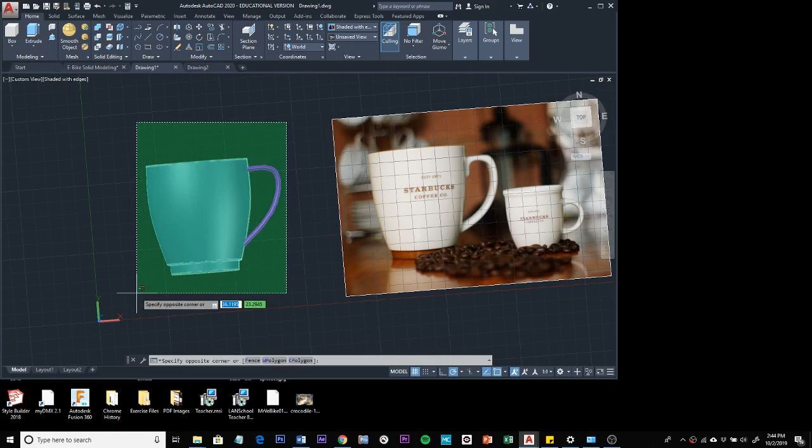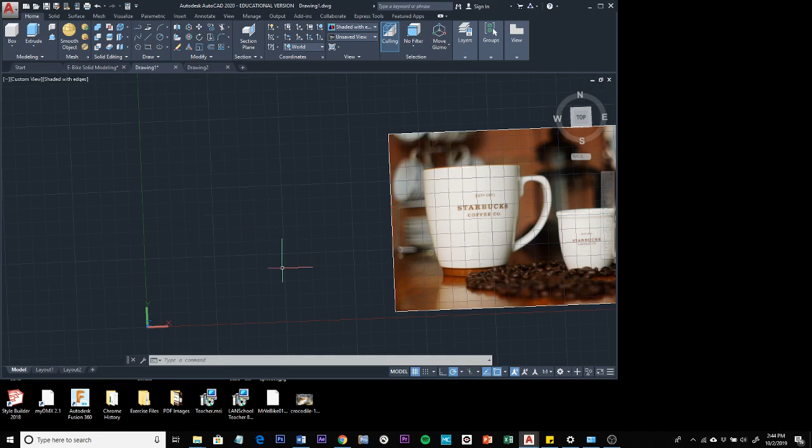So this is the goal here in mind, that I wanted to kind of recreate this shape. You could come up with your own design. You could find a mug that you want to copy or try to emulate online. But I just found this image and imported it in here just to show you visually what I'm trying to copy. So I had a bunch of reference lines here, but I'm just going to freehand this. And I also have a bunch of layers.

So however you want to organize your project, that's up to you, but I would advise you to stay organized in case you want to isolate a specific layer and hide the other ones. You could create multiple layers. I created a cup layer, a handle layer, a 3D cup layer, and a 3D handle layer. And if I wanted to, I would create one more that would be just the finished mug layer.

So I'm going to do this in steps and copy my work over so that I retain my original drawing. You don't have to necessarily retain yours, but it's always good if you want to modify later to keep steps. So what I'm going to do first is create this outline, and what I'm aiming for is just half of the mug. I don't have to do the whole thing. Just starting at the half point, I'm going to trace just visually the outline of this mug.

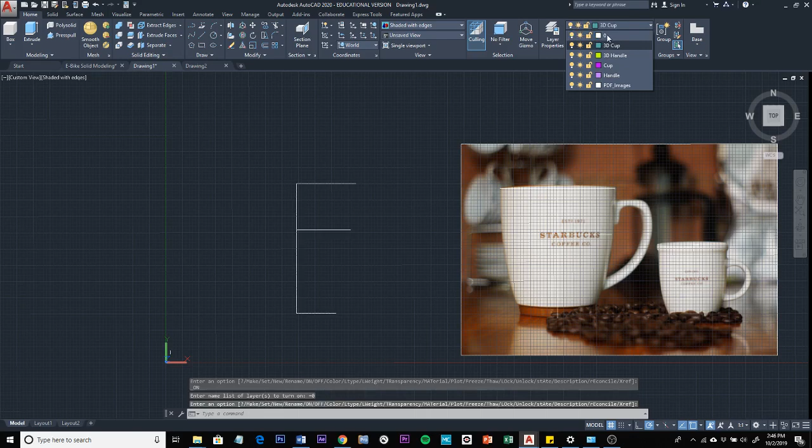To do that, I'm going to use the line tool to get started, and on my 0 layer, I'm going to turn it on first, which is one that you have as a default. I created a couple of lines here that are just reference lines for me. Since I'm trying to create a specific shape, I used this picture and referenced some lines.

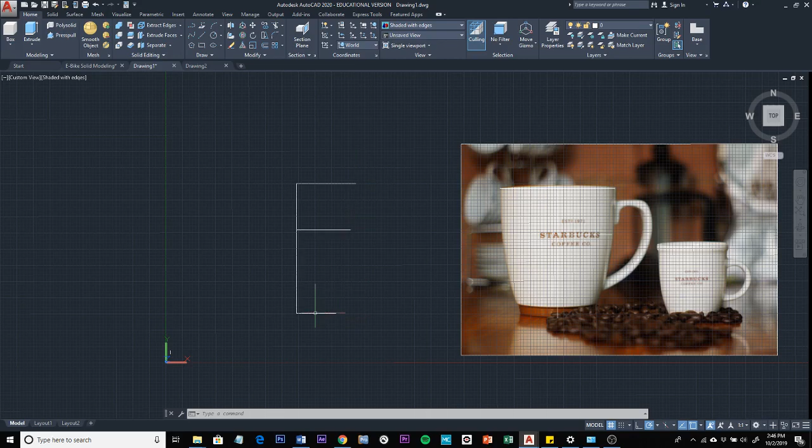So this is the line from the bottom over to the edge, the midpoint, and then this is the midpoint out to the edge at about where the Starbucks label is. And then I did a midpoint out to the outer lip to just give a rough shape. Using these points, I can create an outline. So I did a little bit of work ahead of time. You could freehand this, but I advise you to just stick to a plan.

And if you want to use straight lines, there's parts of your cup that'll have straight lines, and then on this there's a curved line, which is something that I would like you to use in this exercise as well. So a curvy line like this is going to be created with the Spline tool. And there's 2 modes to create lines with Spline. If you hover over the tool, it will give a good description there. You can either draw a spline with fit points or control vertices. And I will show you the difference in just a second.

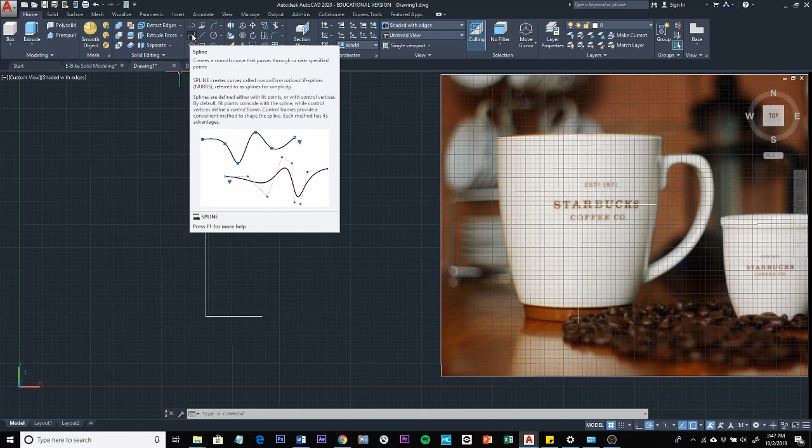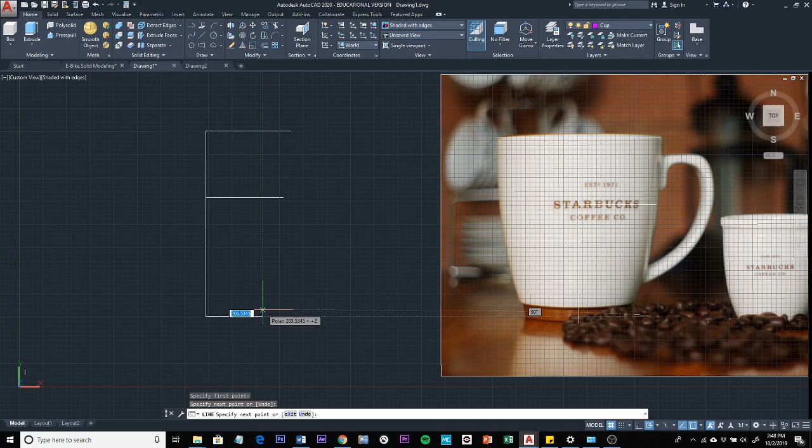So I'm going to start modeling using these reference lines, and I'm going to be on my cup layer. With the cup layer on, my first couple lines are going to be straight lines. So I'm going to use my line tool here, and I'm going to click. This is going to be the midpoint of my cup. I'm going to click there, and this will be the base. So that's the base of my cup. And you want to make sure you have a wide enough base so when your cup is full of liquid, it's not going to topple over. Just keep that in mind when you're designing your cup.

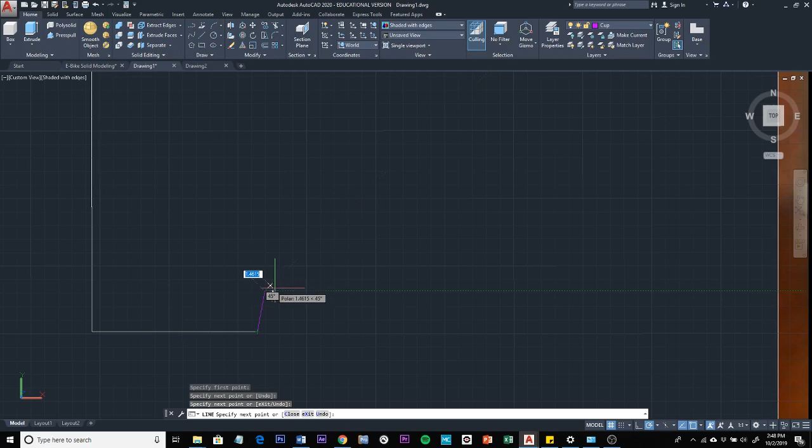Alright, and then I'm going to step up just a little bit here at a steep angle. But it's not a 90 degree, it's kind of angled out. And then I'm going to step over at a little angle here, just a little bit. If these reference angles are bothersome to you, like these snapping points, you can temporarily turn them off down here. Polar tracking is the one that really snaps to those lines. So with that off, I can more easily freehand. That's a better way to put it.

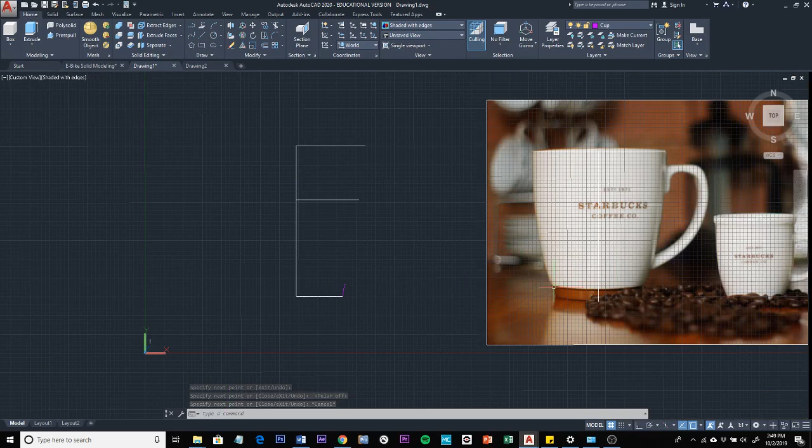So I'm just going to give a little detail here. I'm going to zoom out to show you what I'm trying to create. So there's this little jut that comes out of here. So it needs to be a little bit longer. After you make a line, if you want to elongate it, you can just simply click on it and you get these stretch points. So I'm going to click on that point and then stretch it out.

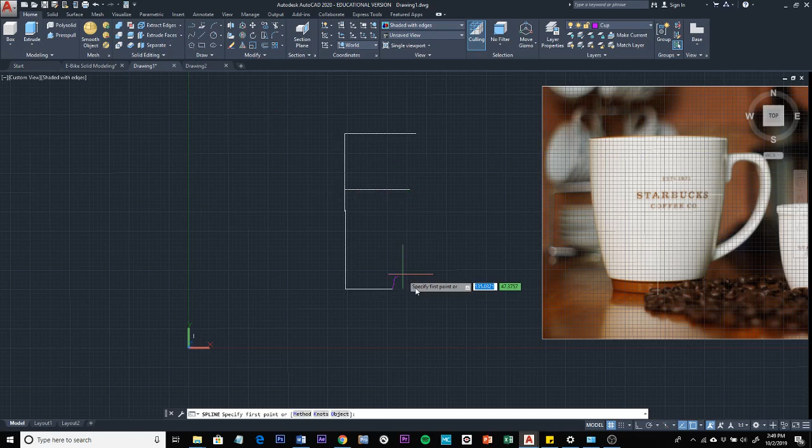Okay, that's a little better. I just want a little detail there. So this next line is going to be created with the Spline tool. It's a curvy line. So I'm going to click on the Spline tool, and then it wants to define a starting point. I'm going to snap onto the end point of this line.

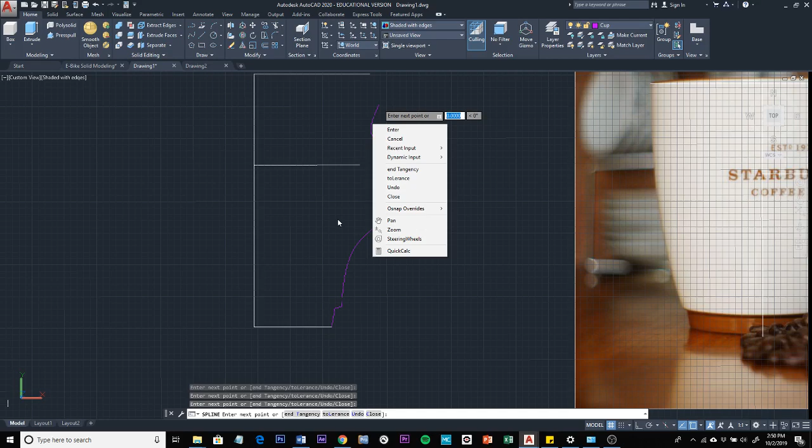And then the way this works, I'm just going to create a crazy line here to show you. But it starts to create a curve, and the next point that you would click controls kind of the shape of the spline. So let's just say I wanted to click out here and then go way over here, make this nicely weird shaped cup. Whoops. Alright, so there's a nice spline.

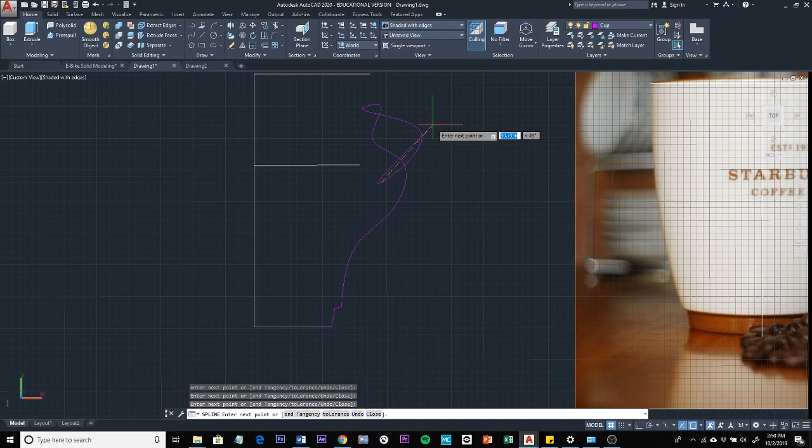So I don't want to keep this line. I'm going to start over. If I hit escape normally in a line tool, it would keep your line. It would just be done with the line tool. With the spline tool, if you press escape, it will not save any of your line. So to accept this line, you have to press enter. I'm not going to. I'm going to press escape, and it's going to remove the line completely.

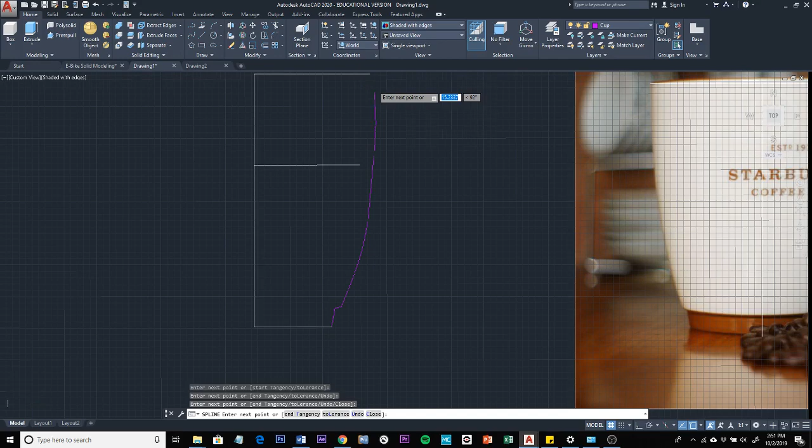Alright, so there's that. Now I'm going to be more realistic in my approach here and create a nice curve for my cup. So I kind of want to go over, and I'm actually going to go outside the bounds of my guideline here. Maybe I'll click right here, then click again over here, and then end it here at the snap point. And again, I don't want to press escape because that will undo my line. I want to press enter.

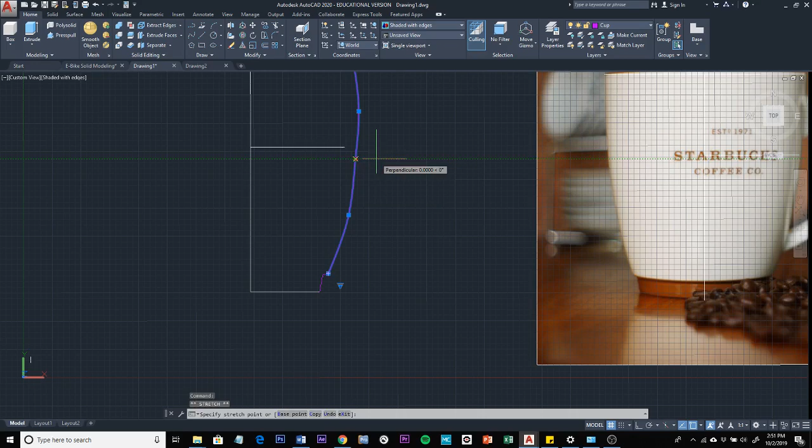Alright, so here I have a spline, and if I select it, it has retained these points here. These are called stretch points. Actually, they're fit points. So you can stretch your fit point, like change its location, by hovering over one of them till you get those arrows, and then you would actually just click that point and then move it away from the origin and then click a different spot. So that's an easy way to adjust these.

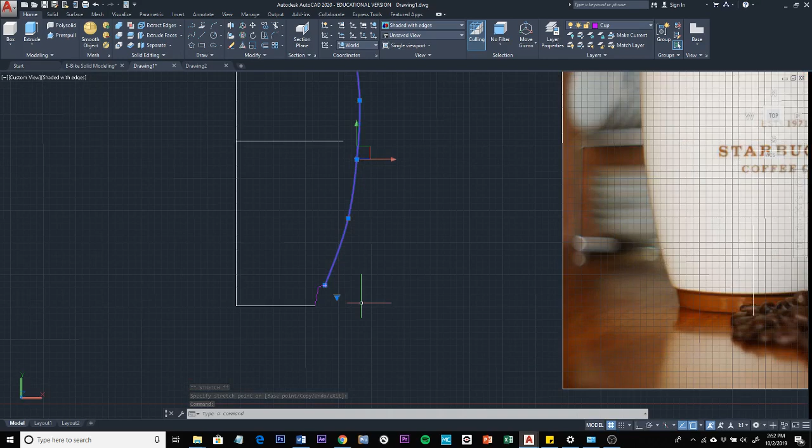So I'm going to make an easier adjustment here. And just to show you the difference, if this was created with the other method of creating a spline, which would be using control vertices, this is what it would look like. So down here, once you have a spline selected, there's a menu that can be found in this down arrow. I'm going to change to control vertices instead.

Now with control vertices, the vertices follow the line, but they're not on the line, and these are kind of like gravitational pulls. You can grab one of these and pull it away, and it pulls the line that way. So each of these have kind of a gravitational pull on the line, and you can use that to kind of edit the shape.

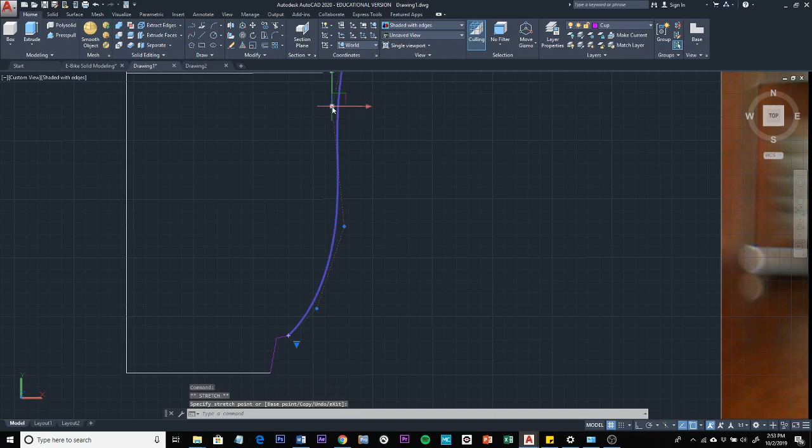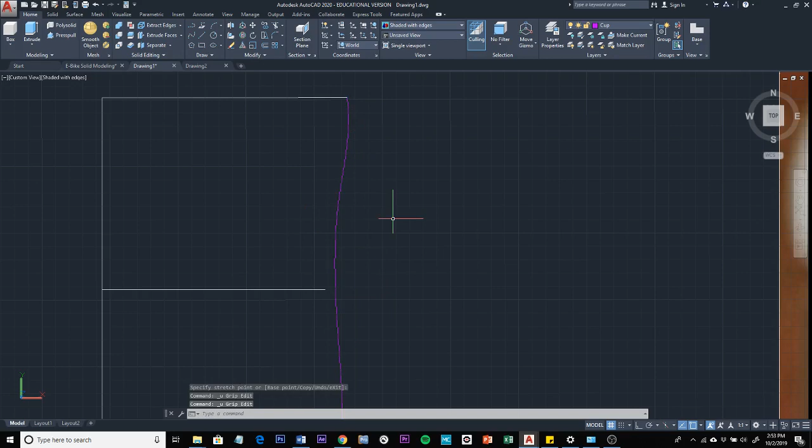I personally like to use the fit points instead of the control vertices because it's a more exact placement. But this, I don't know why someone would choose this, but I guess you have a little bit more freedom in creating more natural looking curves with the control vertices. So I'm going to undo all of that. Go back and change this to fit points.

And I'm going to edit my shape a little bit. If it doesn't do what you want it to do, you may need to zoom in to the point, because it may snap right back to the place it was before. Alright, that's a pretty good shape. Move this one up a little bit.

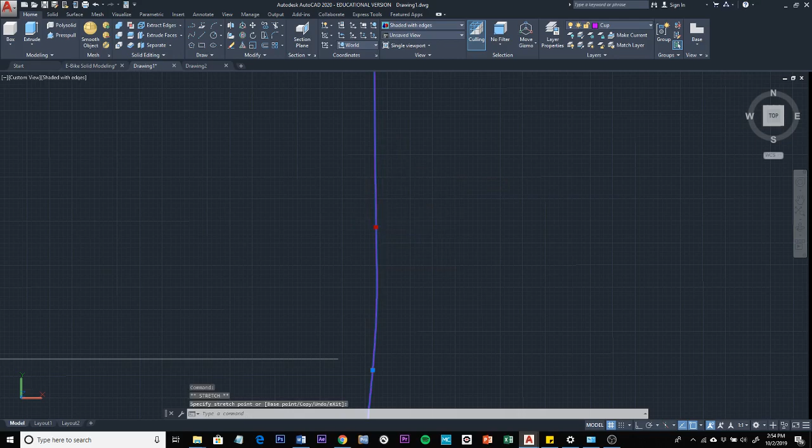Alright, so what if you made your spline and you didn't give yourself enough of these fit points? You want to add more curves to your shape. Or maybe you added too many, and so it's really hard to adjust it to make a smooth, continuous line. You can remove them really easily by hovering over it and then select Remove Fit Point. That's easy. Getting rid of them is easy.

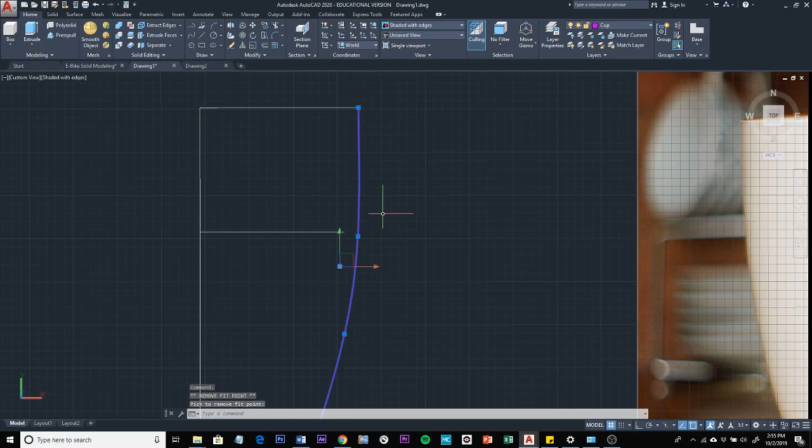Adding a fit point is also easy, but you can only add them in the order that you drew the line. So if I want to add a point between these two, I would actually hover over this point and choose Add Fit Point. And it will add one in between those two points.

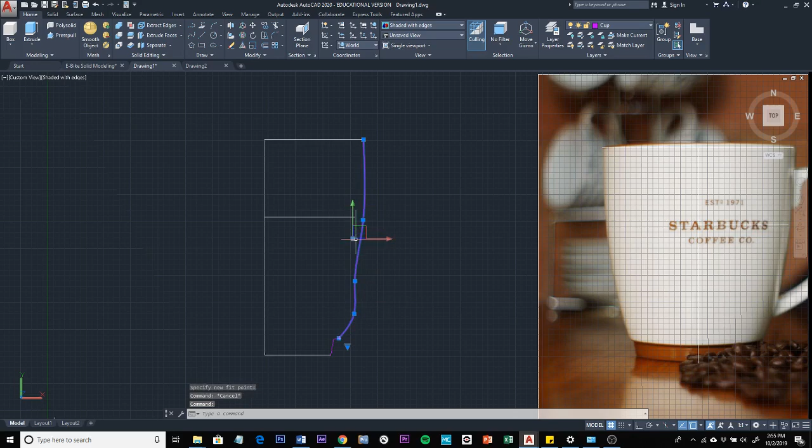If I wanted to add a point in between these two points, and I hovered over here and said Add Fit Point, it's not going to allow me to have it in between those two. It wants these two, so it's following the order of the line that you selected, the order that you clicked to make the line.

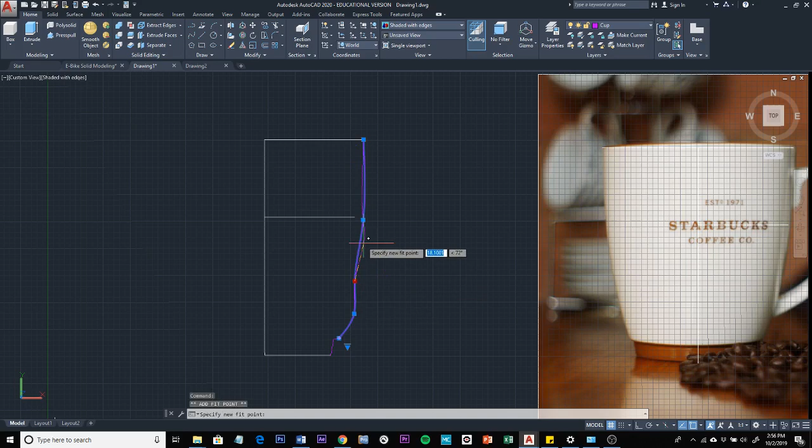So if you want to add a fit point, you choose the point before. So between these two, I'd have to choose this one and add a fit point, then click somewhere over here. There's a lot of stuff it's trying to snap to, so you may want to turn your snaps off.

So there's a nice shape. I'm going to undo all that and get back to my original shape here.

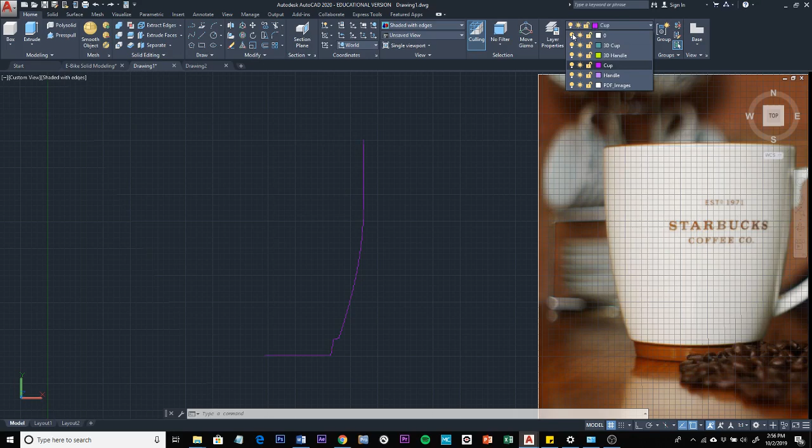Once you get the outline the way you want it to be, I'm going to hide my guidelines here. This is another reason why it's good to create separate layers, so you can hide the stuff you don't want to see. So here's my outline, and if I revolve this, it would be a surface because there's no thickness to this, and you would not be able to print that.

So what we want to define is what is the space here. There will be an inner cup surface and an outer cup surface, and in between would be all the solid material. So what I'm going to do first is join all these lines together.

And then I'm going to offset. I predetermined the distance that I want to be 4 millimeters, so I'm going to choose 4 and press enter. The object that I want to offset is this line, and I'm going to drag to the inside and click.

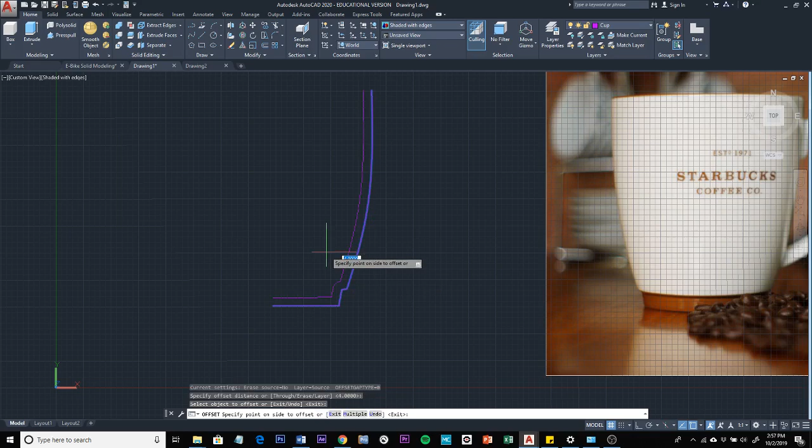Now this created separate line segments, which is actually nice because I don't know that I want to keep this detail here on the inside. I kind of want more of a smooth inside surface, so I'm going to delete these two lines here.

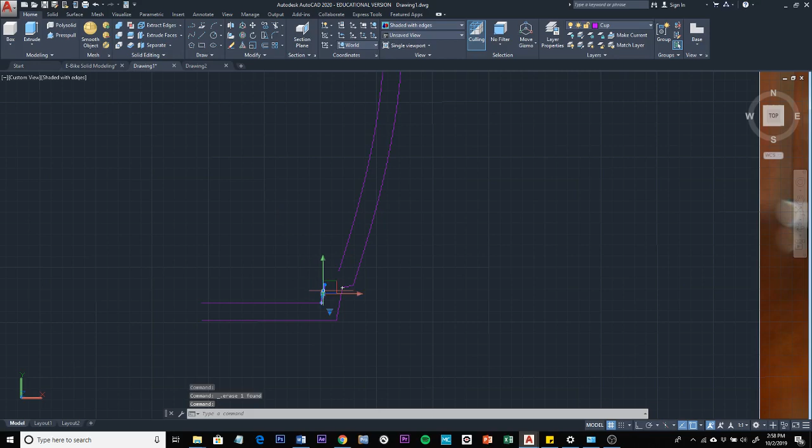Whoops, I'm already in the offset. I gotta get out of that. Escape. Delete that part, and I'm going to delete this part. And I think there's a little tiny piece in here that I'm going to delete as well.

Then I'm going to change the location of this. And see, this transformed into control vertices, and it is a spline. Even though it looks like a straight line, it's a spline that is made up of control vertices.

So first thing I'm going to do is select this line and change that to be fit points. Now I can see that there's extra fit points in here. I'm just going to remove this fit point. And then I'm going to drag this over just a little bit.

I'm going to use another spline to kind of join these two lines together. So I'm going to go to the Spline Tool, click there, click here one time, and then click at the end point, press Enter. So now I have a nice smooth surface on the inside.

Now this could be a little bit of a thin point here, so I'm going to edit this again. I'm going to grab this and change that to fit points, and then move this point up somewhere, like over here, if I can. Here we go. Nope, doesn't want to move. Let's move it way over there for now.

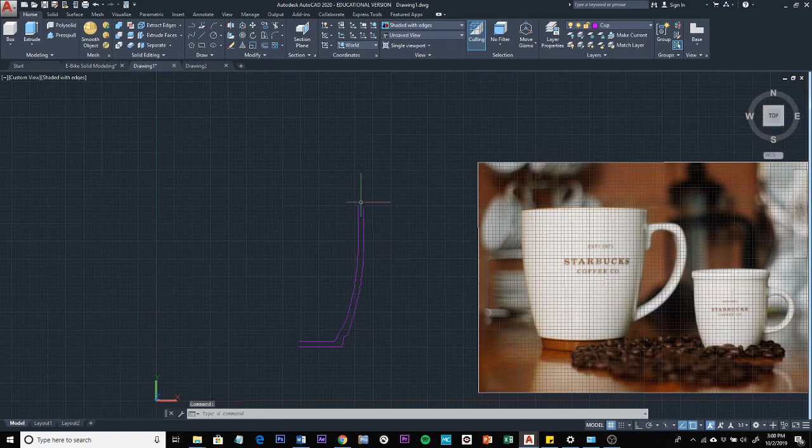And if I wanted to, I could make this more curvy, but for now we're just going to leave it like this. So the goal is to get a cross section of what your cup is going to look like. Right now this is open-ended, so this is not going to be able to create a solid. I want a nice closed shape.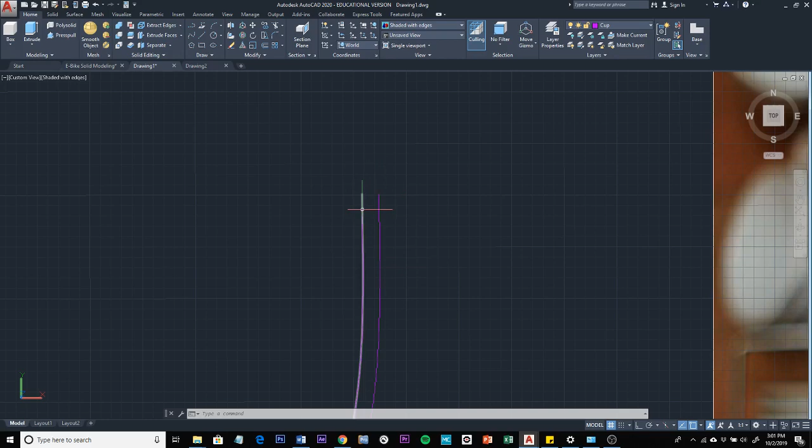So this is where I could determine how I want the lip of my cup to look like. I don't want a squared off lip, so I'm going to drop this edge down a little bit.

First I'm just going to move it out of the way, then grab it again and move it slightly in and down. And then I'm going to grab the Spline Tool again and just make kind of a rounded lip here. Enter. There we go.

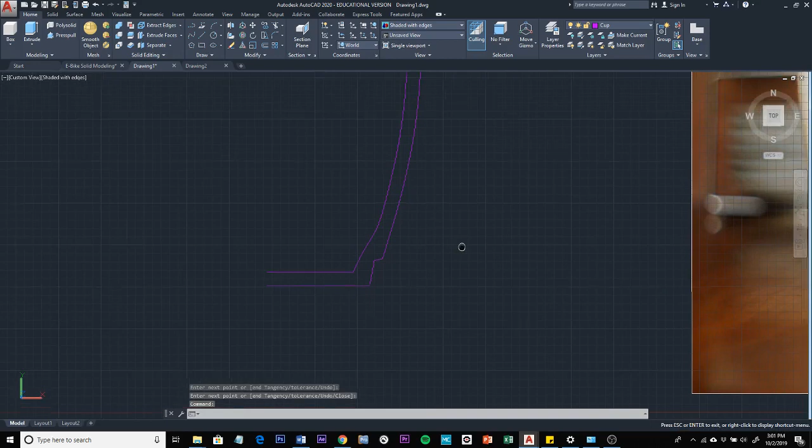Now the bottom of the cup is not closed, but we're going to use this axis to revolve around, so when it's revolved around there's no gap. There will be no gap open here, so you don't really need to close this shape. You just need all of these lines to be joined together. So I'm going to do the join command, select all the lines I have so far, and press Enter.

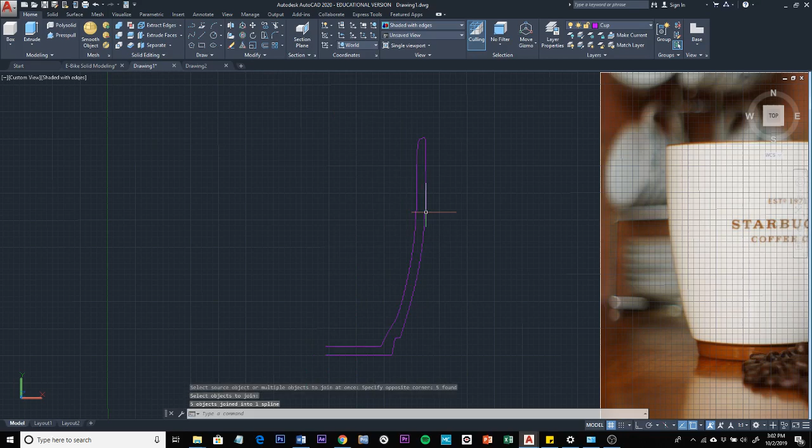Alright, now I'm done to the point that I would need to revolve this cup. So I'm going to, at this point, make a copy of this. You don't necessarily have to, but I'm going to anyways. So let's go ahead and copy, select that object, copy it from this point, and then I'm just going to drag it up here somewhere.

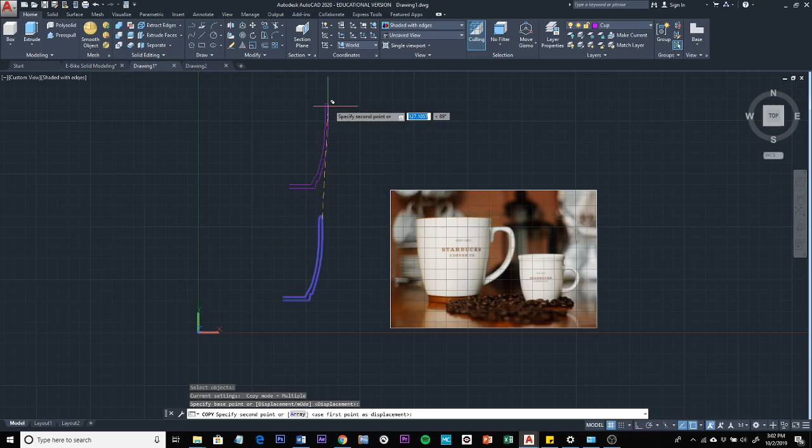I don't have any snaps. Let's do 250.

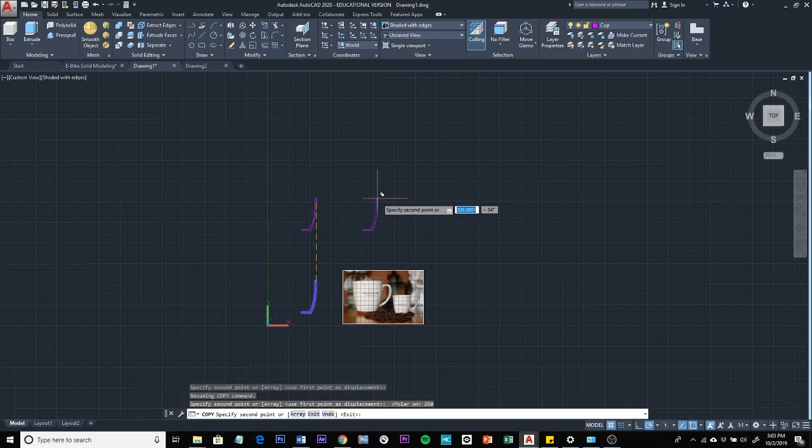Alright, so here's my cup outline, and for my handle I'm going to use the Spline Tool and I'm just going to freehand, but I want to be on my handle layer. Then I'm going to grab the spline and choose any point on the outside.

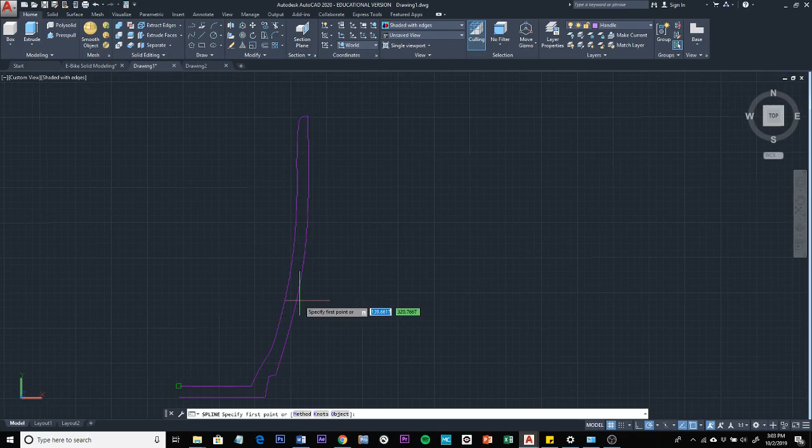So if you want to snap to any point on a line, you could do Shift right click, choose nearest, and I'm going to start about right here. And then again, I'm freehanding, so I'm going to turn the polar tracking off. And I'm just creating my own custom handle shape here.

So I want to end it nearest, say about right here. Enter. So here's my handle shape.

I zoom out just to make sure I like that shape. I may want to just have this angled down more, so I'm going to add a fit point. Click here. Oh, they removed it.

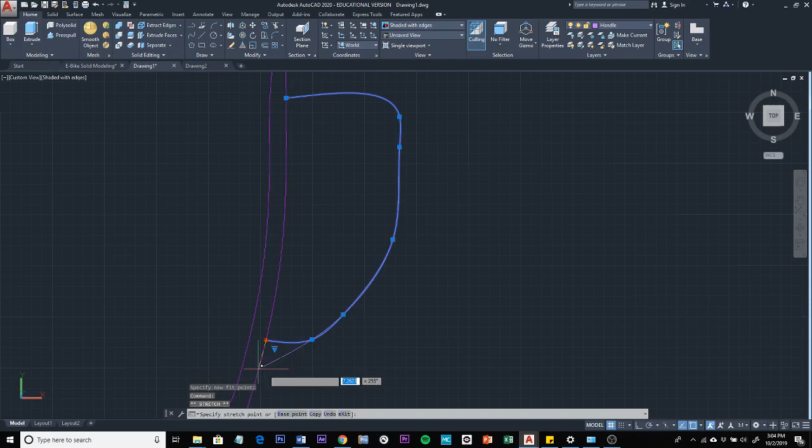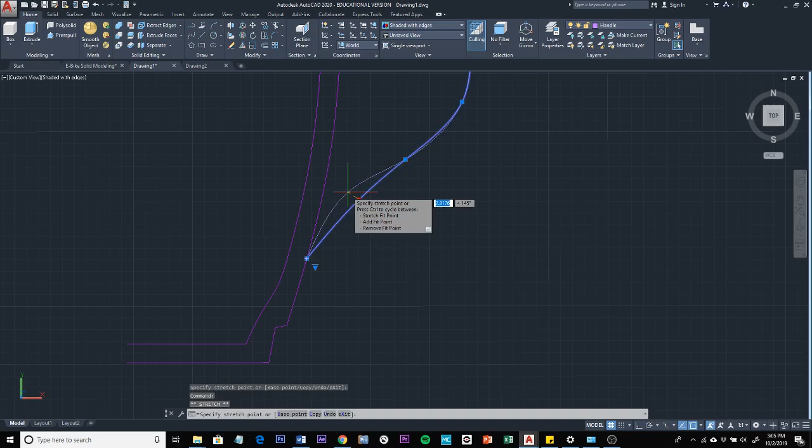Then I'm going to Shift right click, nearest, and then have it snap somewhere around here. Move this over this way a little bit. Something like that. And I don't really like this fit point, so I'm just going to remove it. There we go. There's a nice little shape.

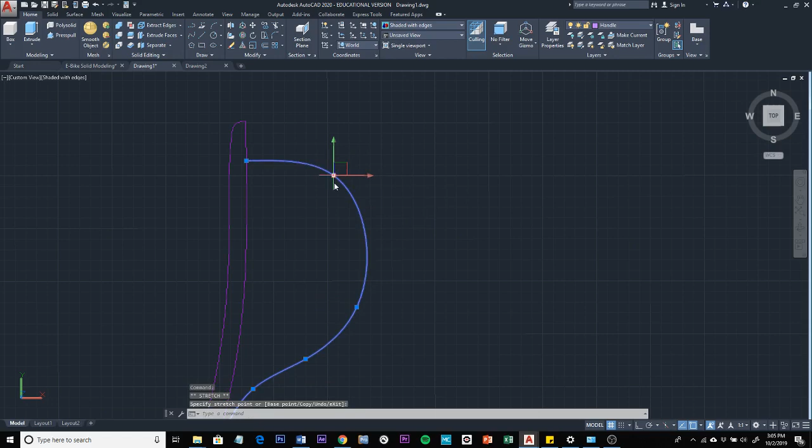It may be a large handle, but it'll do for now. I'm just going to maybe move this in a little bit. There we go. Alright, I'm liking that shape.

Alright, so the next thing you want to do is determine what shape you want to sweep along this path. So what I want to imagine is a cross section of this handle. Is this handle perfectly round, like it was bent out of a pipe? Or do I want it to be like a cross section, an oval shape? Or do I want it to be really squared off like a rectangle? That is up to you to decide.

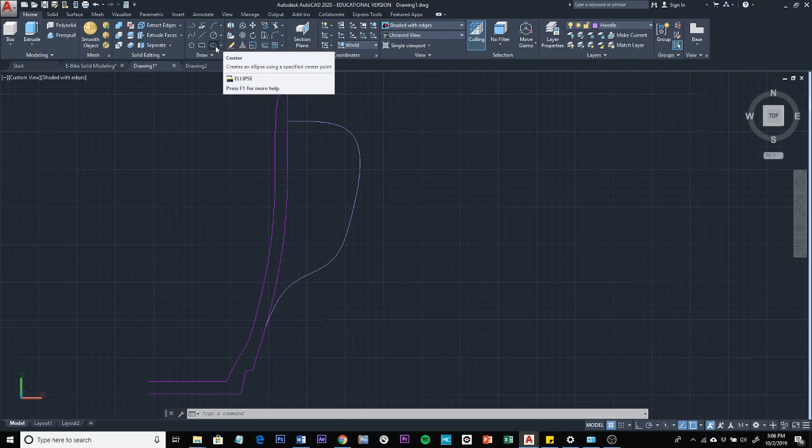I'm going to choose an oval shape, so we'll be using this ellipse tool. And to get a reference of size, I'm going to snap it to the handle somewhere. So there's a snap point here. I'm going to turn my polar tracking back on. Okay, there's a snap point there. There's a midpoint somewhere. There we go.

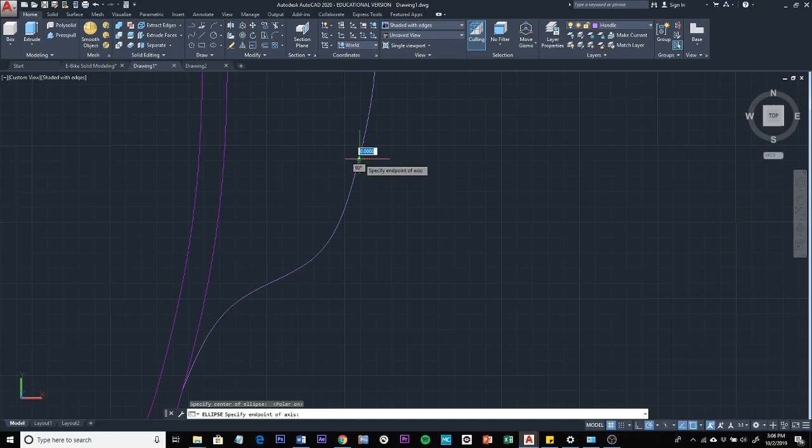So for an oval, it's almost like a rectangle, but you're drawing it out from the center. So it's a width and a height measurement. So I'm going to click here for how wide I want it, and then about like this for how tall I want it.

So this is just a cross section of it, and this could be drawn anywhere on the page. It doesn't have to be right on the handle itself. I'm just going to move it out of the way just to show you that it doesn't have to be connected. I'm going to move this from this point out somewhere over here, random.

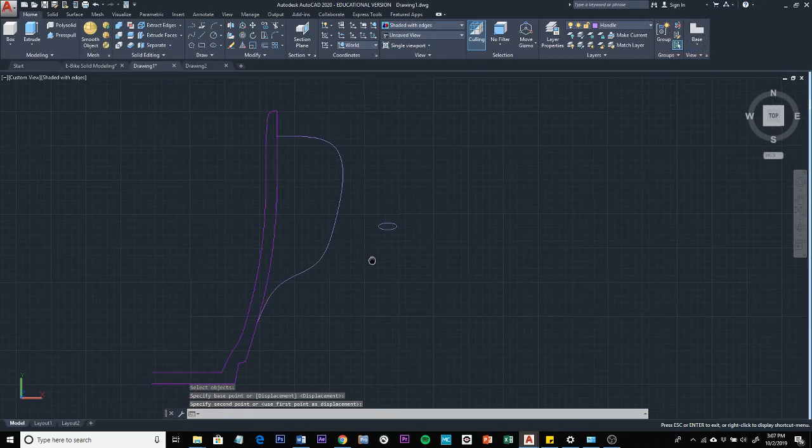And what I want to do is sweep this path with the shape. So before I do that, I'm just going to go ahead and copy everything again, because if something goes wrong, I want to retain this work. So I'm going to press Enter, copy all those things from this point, and let's just go over 200.

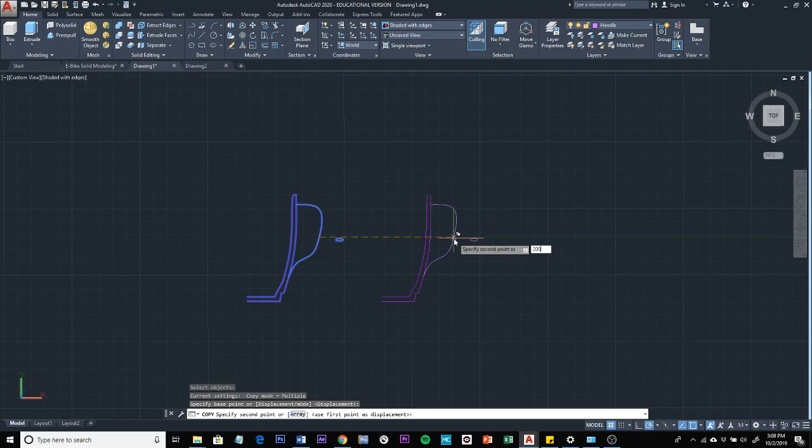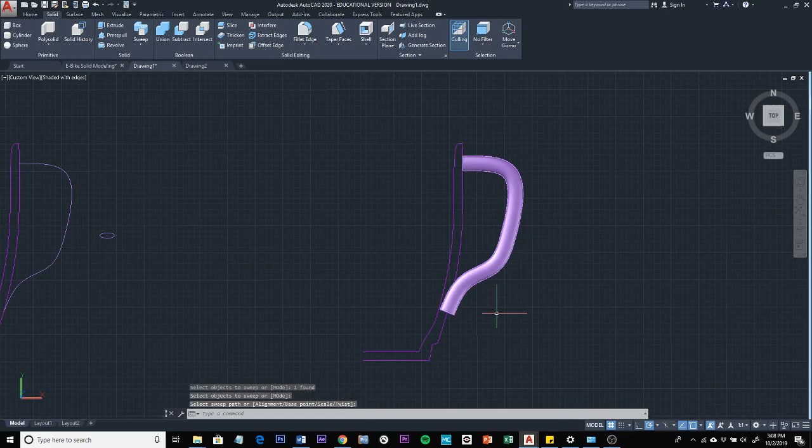Alright, so I'm going to sweep. On the Solid tab, choose Sweep, choose the object that you want to sweep, which is this oval. I want to sweep this oval, enter, along this path. And I'm going to orbit to see what happened here, and it swept the wrong way.

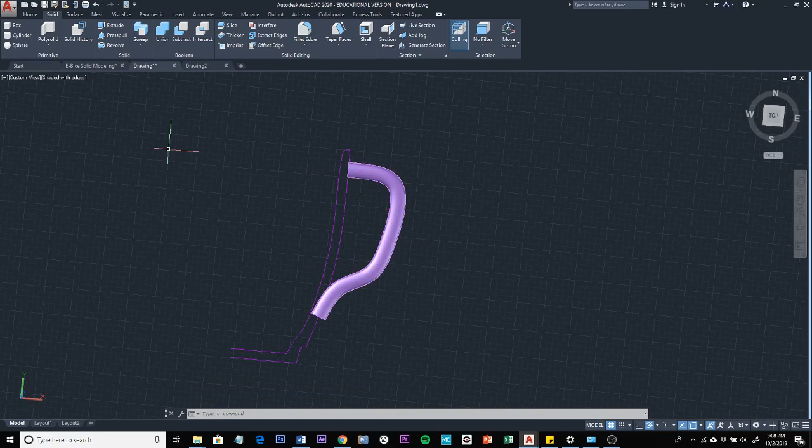So it's 90 degrees off from where I want it to be. I wanted the thin part showing from the side, not the thick part. So I'm going to undo, and before I sweep, I know I need to rotate this 90 degrees. I could remake it where the long way goes this way, but I'm just going to rotate it.

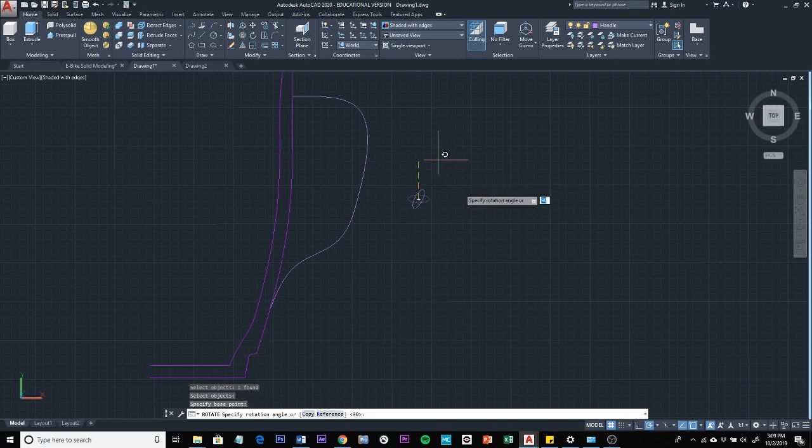So on the Home tab, there's a Rotate button. Choose the object that you want to rotate, press Enter. Specify the base point from where you want to rotate it from. I want to rotate from the center, and then you could choose the degrees of rotation. I want to rotate 90 degrees.

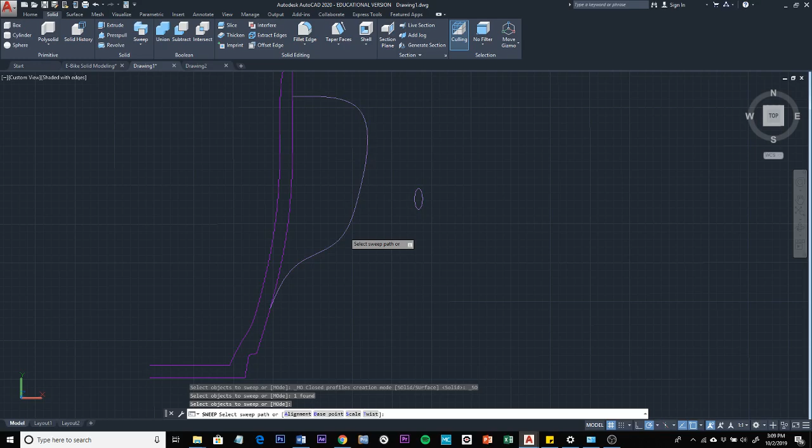Now I'm just going to try sweeping again with that same shape. So Solid, choose Sweep, choose the shape that you want to sweep, press Enter, and then the path you want to sweep along. Alright, so this is what I wanted to have happen, where the thin side is viewable from the side.

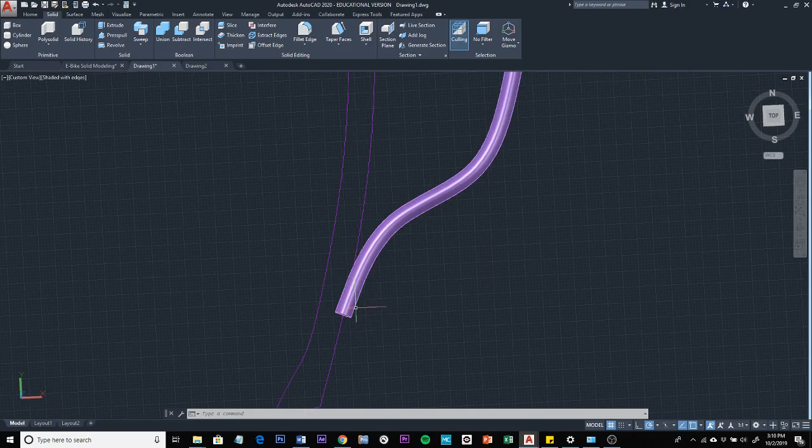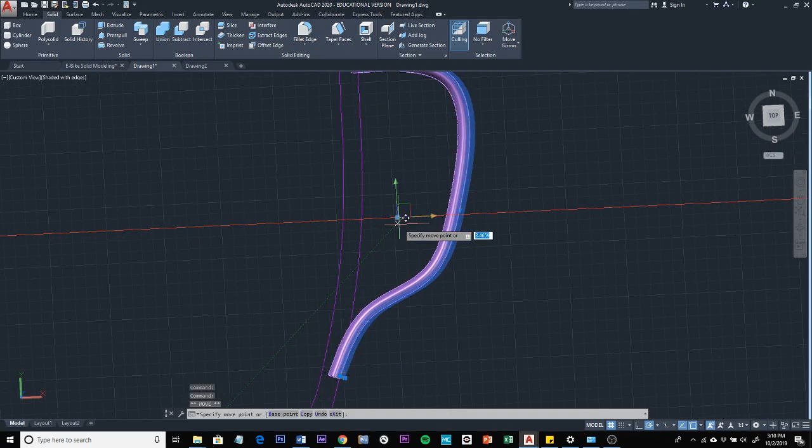That's what I wanted. So we have a problem here. This handle is going to terminate outside of the cup wall, which is not going to look good, and it's just not good modeling here. So I could change the shape of this before I sweep it, like go back a step, change the shape to go inside the cup more, or I could just grab this object and move it inward slightly so that the whole handle is inside, like it terminates inside the cup. That's good.

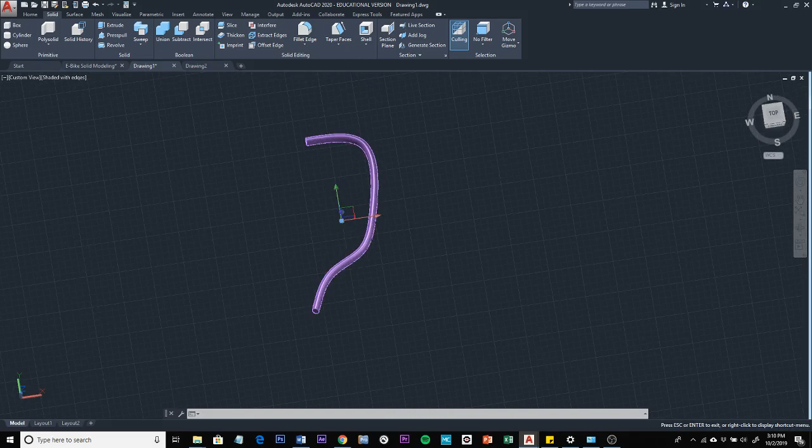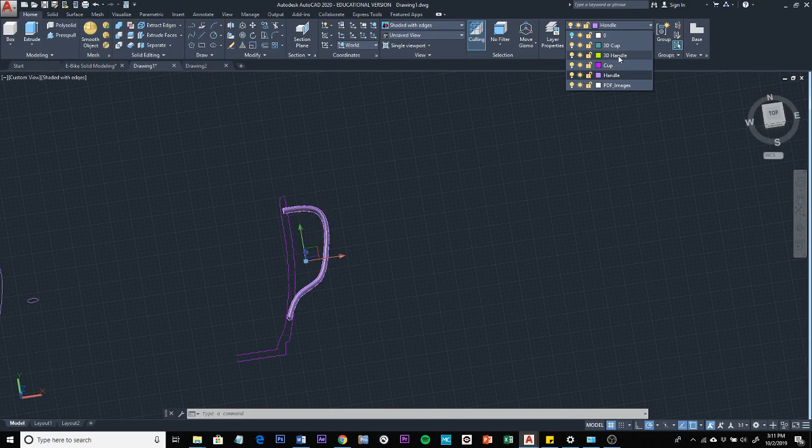Alright, so the next thing I want to do is revolve my cup shape. And to do that, I'm going to switch to my 3D. Actually, while I have this selected, this is my 3D handle, so I'm going to click on that and go to the Home tab, move that to the 3D handle layer. And now I'm going to go to the 3D cup and do my revolve on that layer.

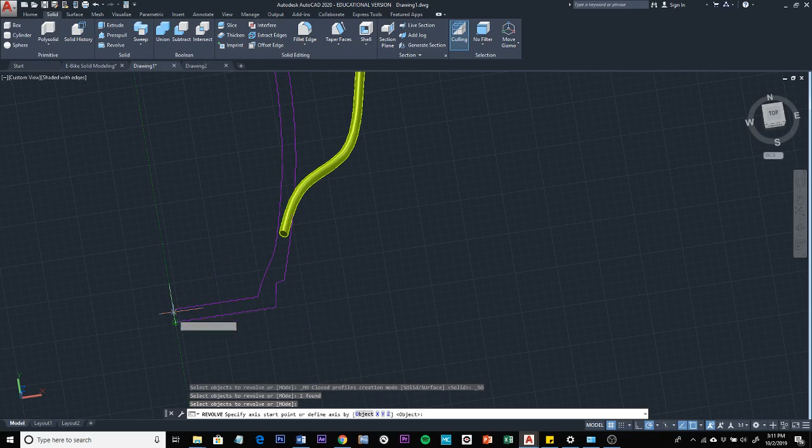So what you want to do is make sure that this is all one solid line before you sweep it—or not sweep, revolve. Go to the Solid tab, choose Revolve, and click on your outline, press Enter, and then specify the start point of the axis, either one of these points. I'm just going to click the bottom point and then connect it to the top point. And then you want to specify a complete rotation of 360.

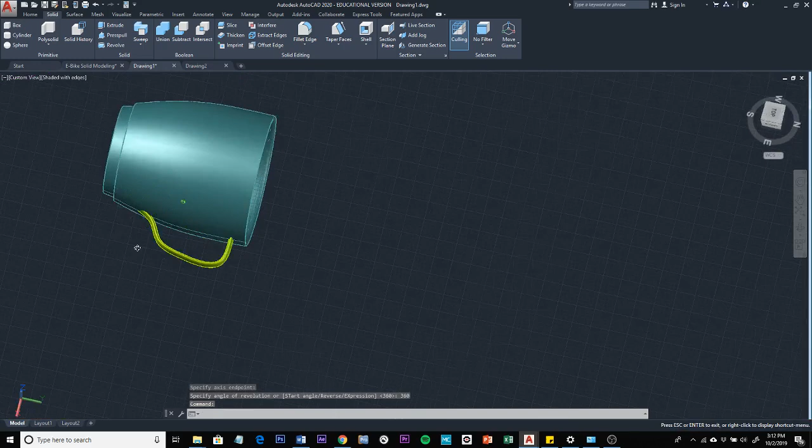Enter. And now I have a solid handle and cup that I can view in 3D, and the handle, in my opinion, looks a little bit small and a little bit dainty. So that's kind of trial and error.

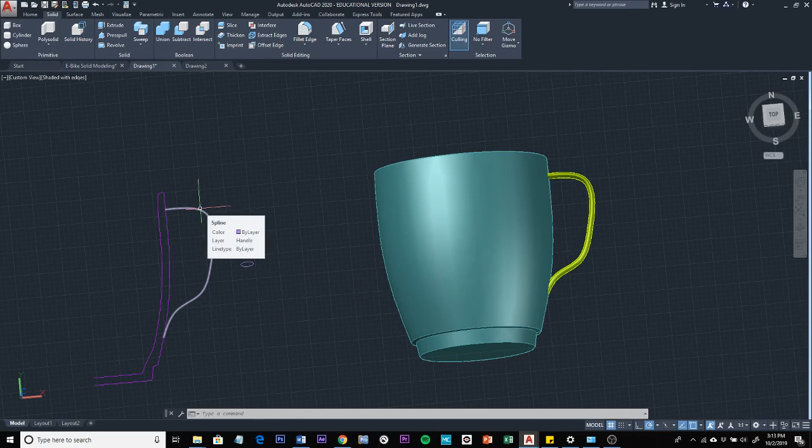From this point, I have kept my spline for my handle and my shape for this very reason. So if I want to go back and change the dimensions and add some thickness to my handle, I could change the shape of my oval and then sweep this same path again, or I could even change the path if I didn't like the shape of the handle. So those are the reasons why it's good to sometimes copy before you do a step, both with spline, revolve, and the shape sweeping.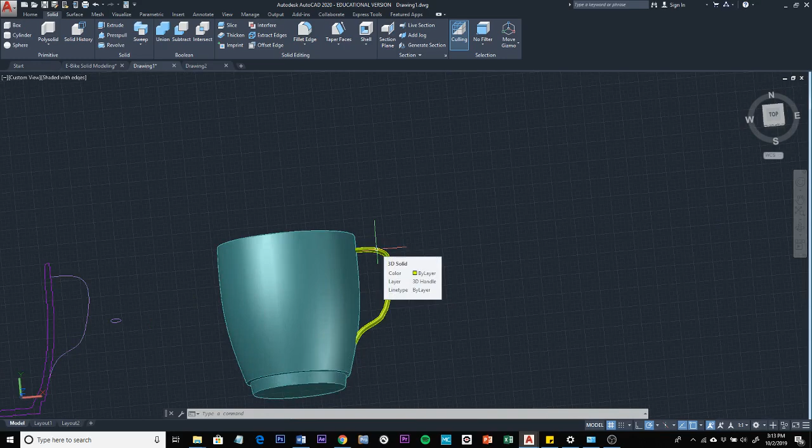It erases the objects that you used in those methods. So if I select my cup and delete it, the line is deleted as well. So you would have needed to have a copy like I did if you wanted to go back and redo that before you revolve it.

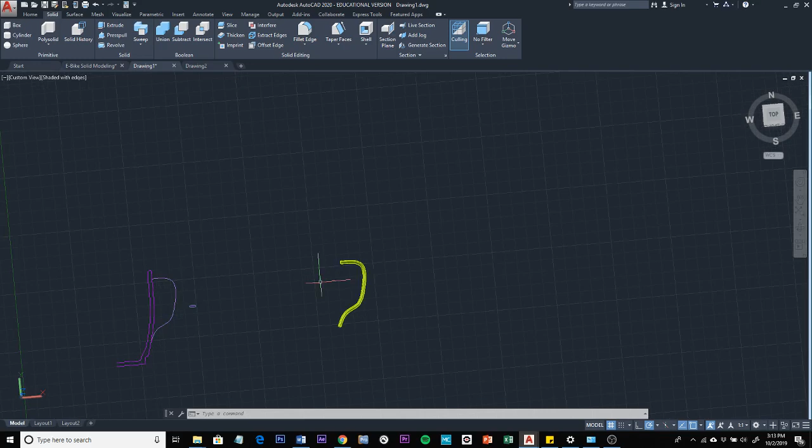So we haven't done copy a lot in class, but it's pretty easy to do. You just select the object that you want to copy. Say I want to make a copy of this oval. On the Home tab, press the Copy tool, specify a base point. Any point really will work. It's just where you're picking it up from, and then you can make several copies wherever you want to.

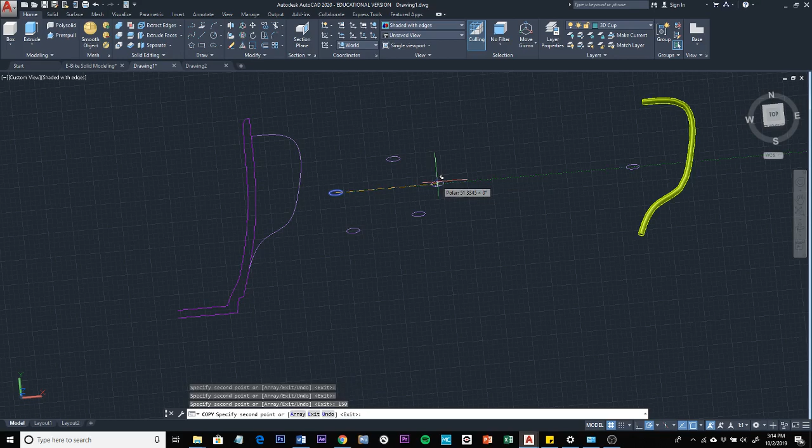If you want to specify a specific distance away from the original, you can just drag away in the direction that you want to make the copy, and then type in the value. So let's say I wanted to do 150 away. Enter. I moved it way over there. So copying is pretty easy.

So I advise that you make copies of your lines before you do the steps of turning it from a 2D layer to a 3D layer. That way you don't lose your work and you can make some edits if you want to.

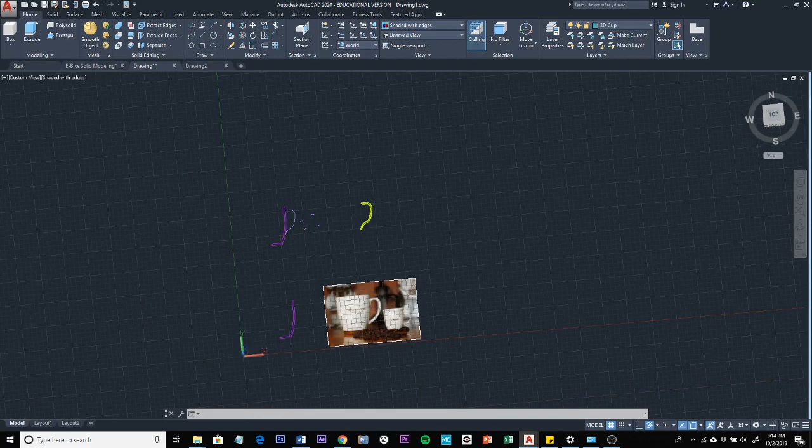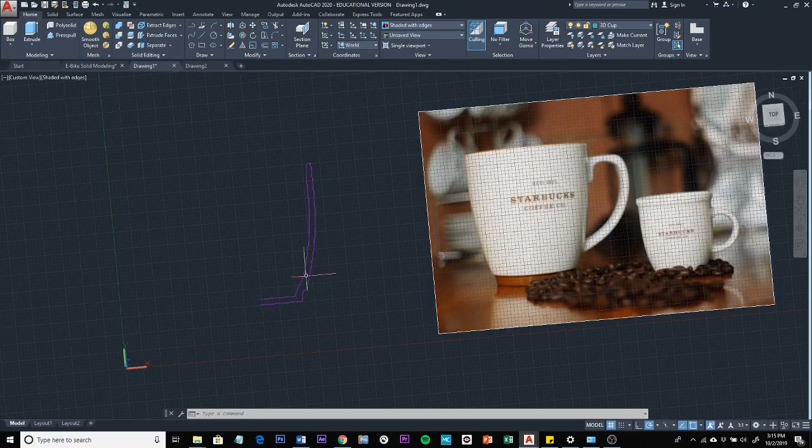Hopefully this is enough instruction, or even more than enough, for you to get started on your projects. The requirements are that it's a 3D cup when you're finished, and it has to have a cup and a handle. So you can either choose to try to copy something like I did, or you could just freehand make your own cup. Good luck.